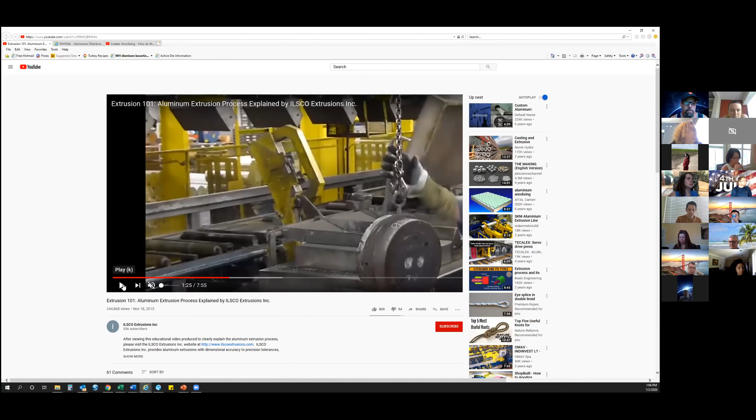This is a die. And where he just pulled it from was what they call a hot box. Before the die can go to press, it needs to get loaded into the hot box and heated up to a specific temperature. That way the heated up billet can easily flow through the die.

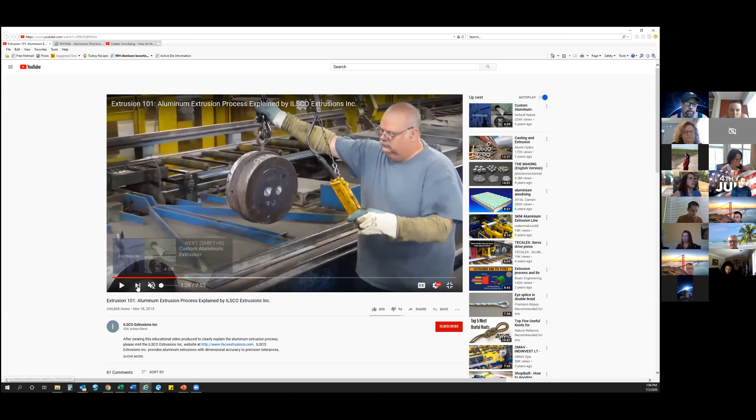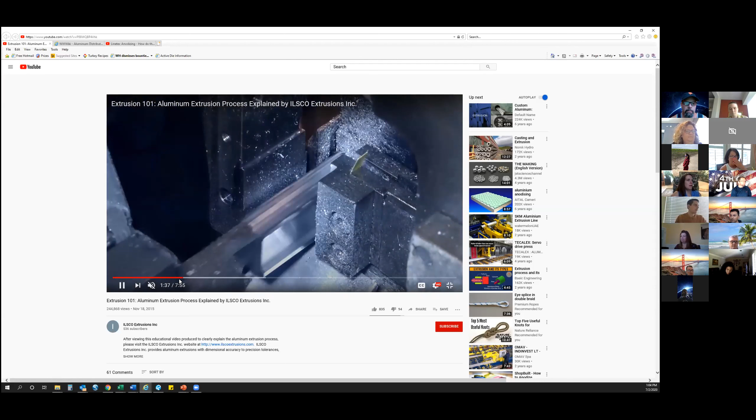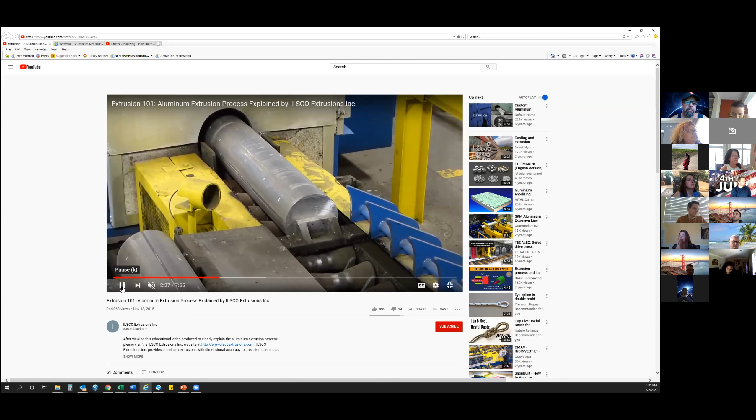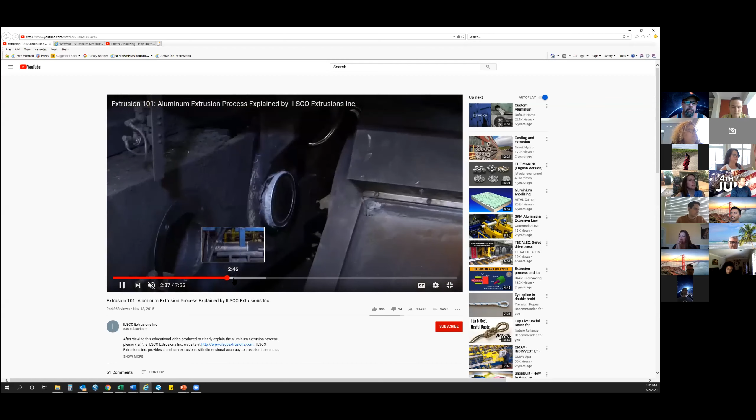These are billets, or you'll hear them called logs. That is what's getting fed into the press. The logs can be at different diameters depending upon the press size. And before the billet goes into the press, it does get heated up to a high temperature, and then will get pushed through the die.

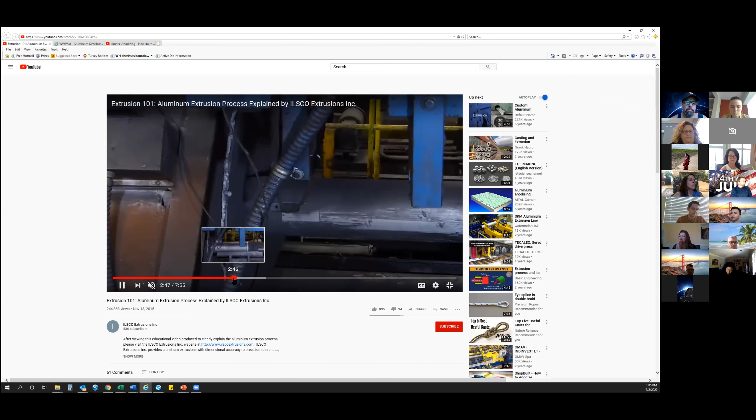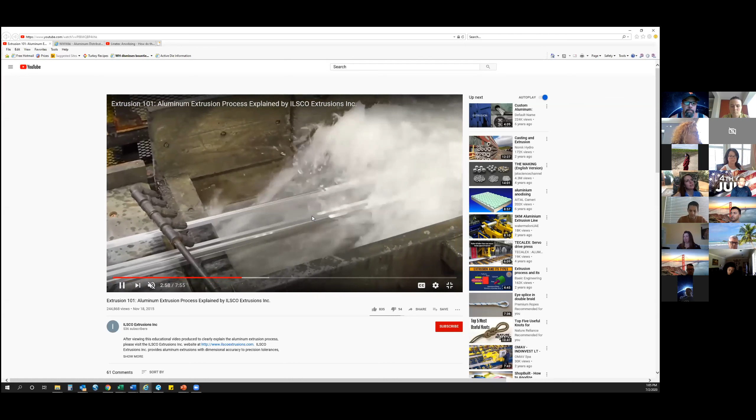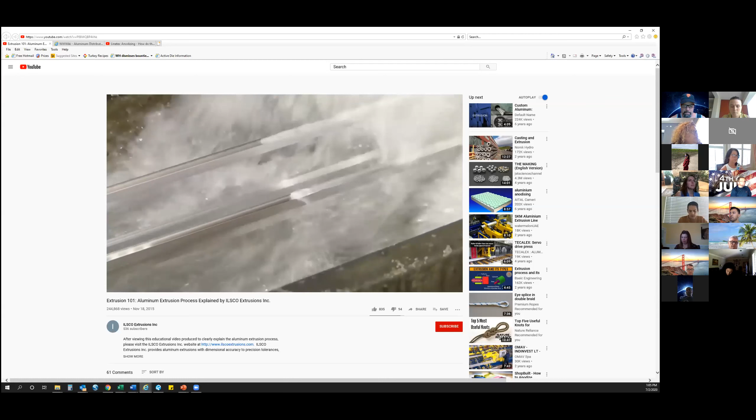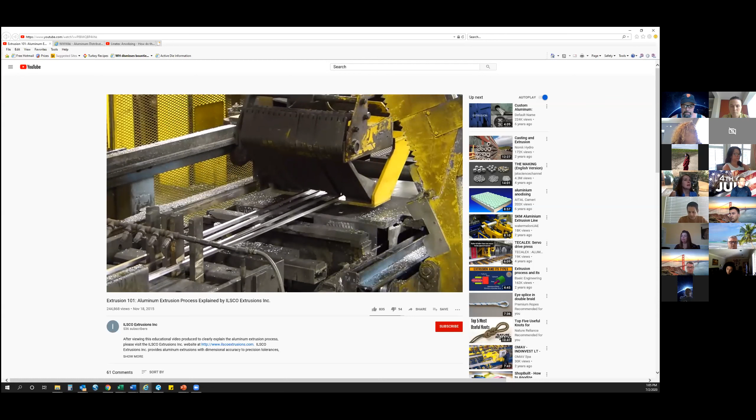As the material is getting pushed through the die, it's coming out into a quench, which can either be water or air, forced air. Typically, you'll see a lot of presses have forced air because the water can be messy. This is critical because you want to cool down the extrusion rapidly so that the properties set to give it its strength. And this can be an issue, especially when you're talking about structural alloys. If it does not get cooled or quenched fast enough, it will not meet the properties.

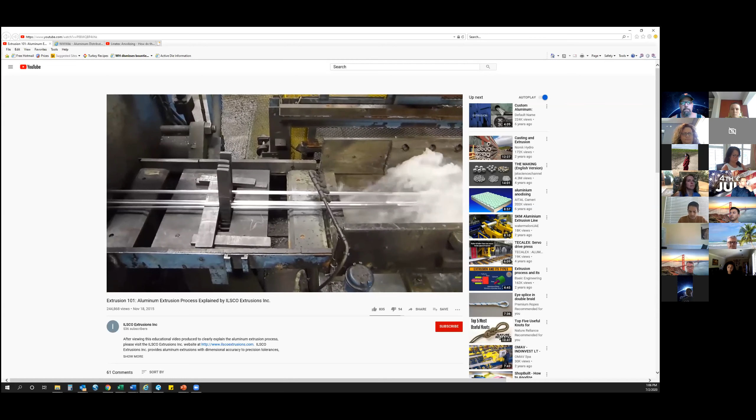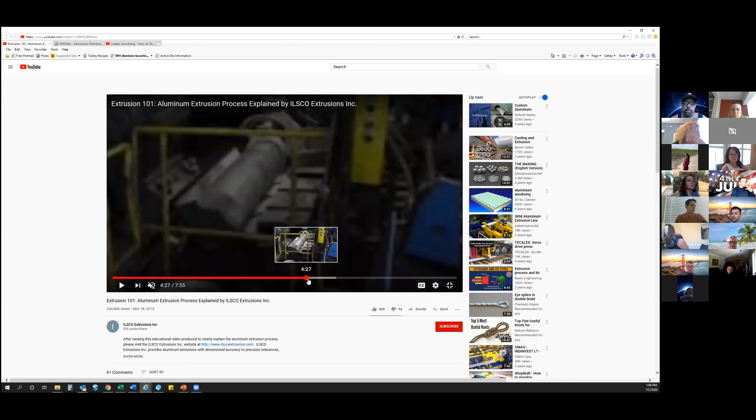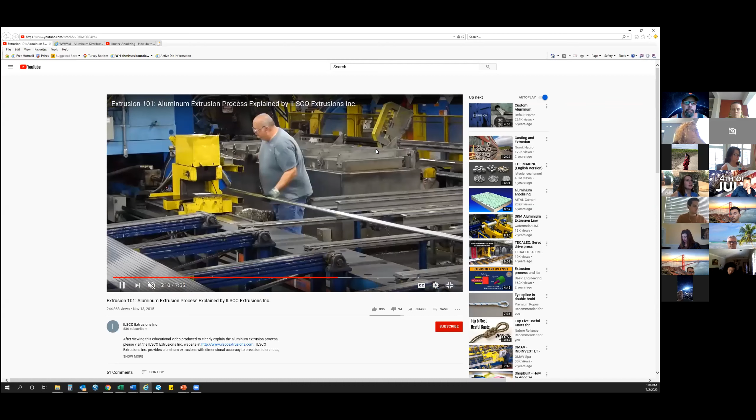After it goes through the quench process, an arm comes and grabs the material and it pulls it down the table, just helping facilitate it. Then it'll go into a set of stretchers, which basically straightens the extrusion and sets the properties. And that's what gives it its final shape.

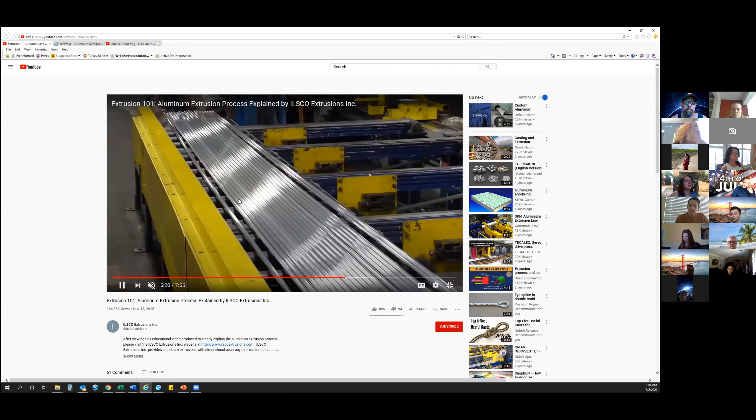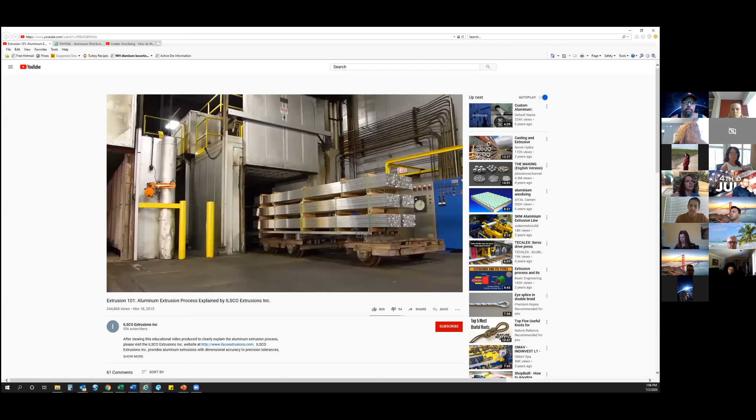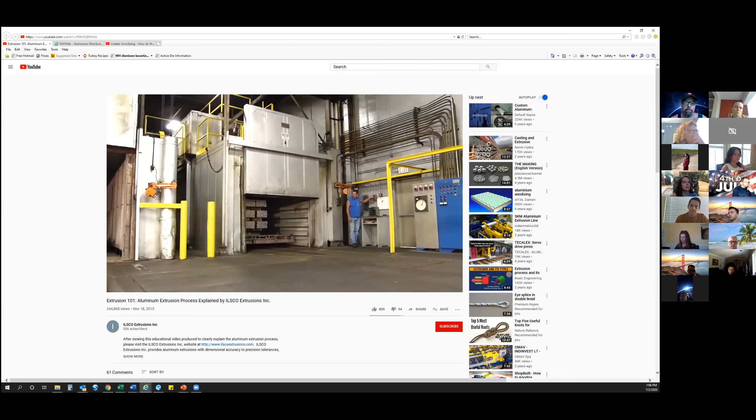Then they will typically give it a rough cut to length. There is a slight variance in that tolerance. And then it'll go into an aging oven where it is artificially aged, and that's what brings it up to the temper. Typically we have T5 or T6 with our architectural shapes.

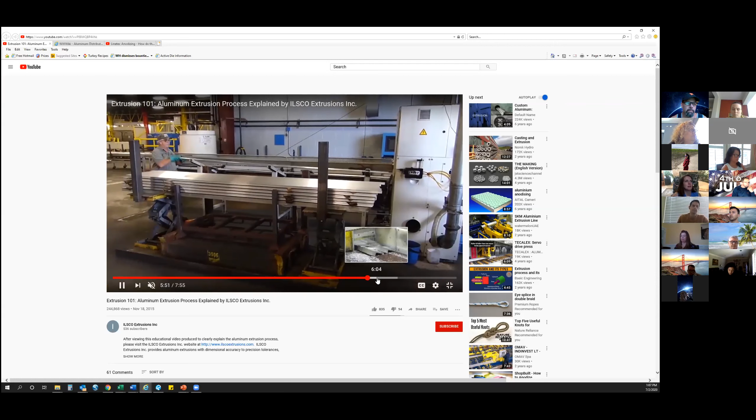And then from the aging oven, it'll either go to fabrication or it'll go to the paint line. And then it'll get packed to come to us.

So basically in this presentation, it's focused on the process starting with the die package and ending with QC out in the shop. This presentation is kind of lengthy, so at the end of each section, I will see if anybody...

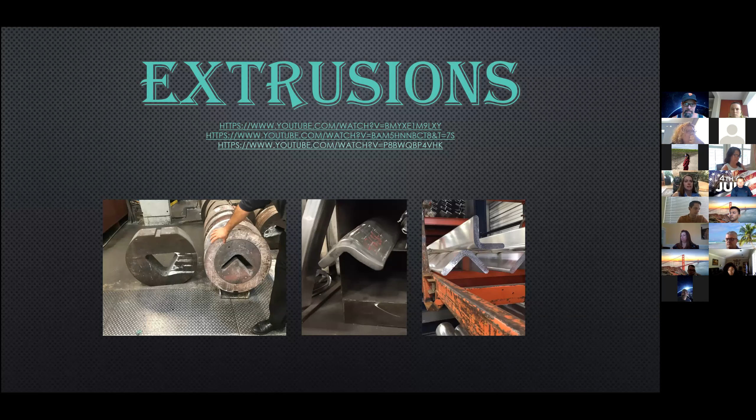So since we're a custom design glazing company, most of our projects require new profiles for extrusions. The first step in the process is the die package and the die drawing process.

Jumpstart provides a set of profile drawings that contain all of the new and existing parts to be sent to the customer for approval. When this is happening, a preliminary set of die drawings is being sent to the extruder to review and comment.

Any extruder requested changes will be incorporated once the approved profile drawings are received back from the customer. Jumpstart will then update and send a new die package to the PM and purchasing.

And while the drawing process is going on, we're keeping track of when the die package was sent to the extruder and when it gets returned, when the die drawings get returned, when they get approved. If there is a revision, we track when it goes back to the extruder for revision and when it gets returned back to us.

And then once the die drawing process is complete, a final die print is sent, and that's what gets processed and posted on the portal, and part drawings get generated for the drafting and takeoff teams.

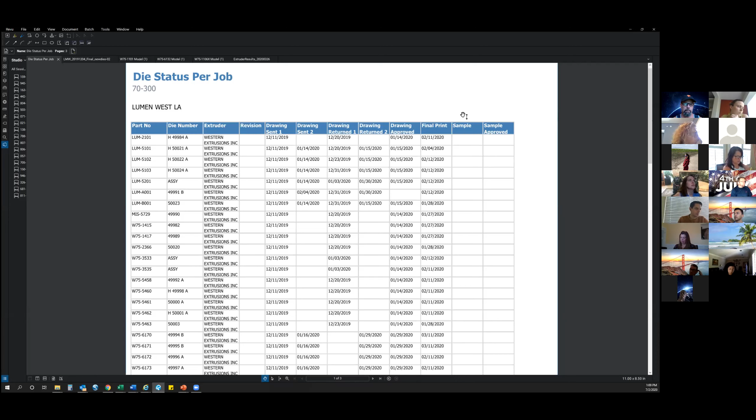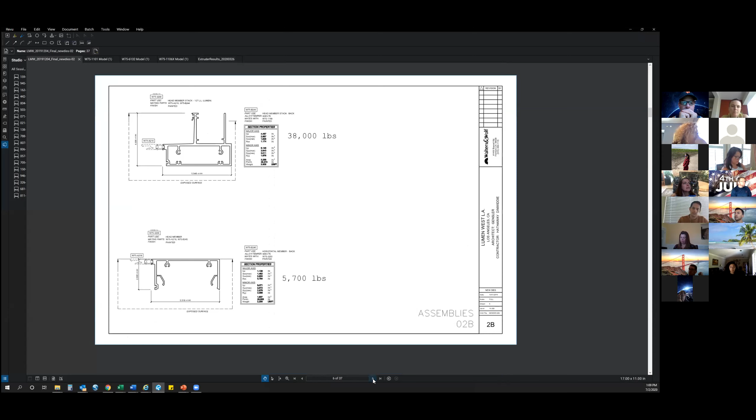Here's an example of a die package. A die package, like I said, contains all of the new shapes and details for the project.

Purchasing will release the new die package to the selected extruder once all the project information and warranty forms are filled out by the PM, and we'll go through that a little bit later. And a die quote will also be requested at that time.

Once all the die drawings are approved, purchasing will release a purchase order to the extruder.

We'll also request first article samples. Standard first article samples are 3 each, 4 feet long, in mill finish. If there are new assemblies, which are 2 separate individual dies assembled together using a thermal break, those will be ordered in 12-foot lengths. The cost for samples and assemblies varies by extruder.

If any of the new dies are going to be used on a visual or performance mock-up, we will not request the standard first article samples. We'll extrude the material required for the mock-ups and check our samples from that. It helps save some time and money in the process.

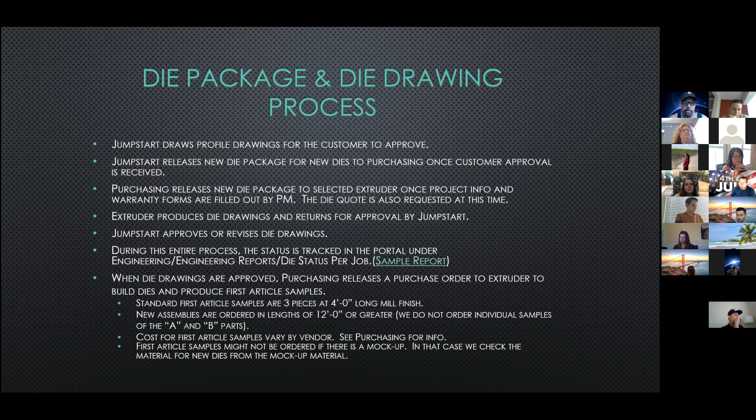Once the first article samples are received, smaller pieces are cut for Jumpstart to approve from. They're typically 6 inches long. The samples are checked for fit with the mating parts and critical tolerances.

Once all of the new dies for a project are checked, Jumpstart provides purchasing with the approval information, and purchasing releases the sample approvals to the vendor. That way, when the vendor has the sample approvals, they're able to release the production order for processing.

It's important to know that once the dies are built, any changes to the profile will result in a revision to the existing die or may require a new die, and there is a cost associated with those changes.

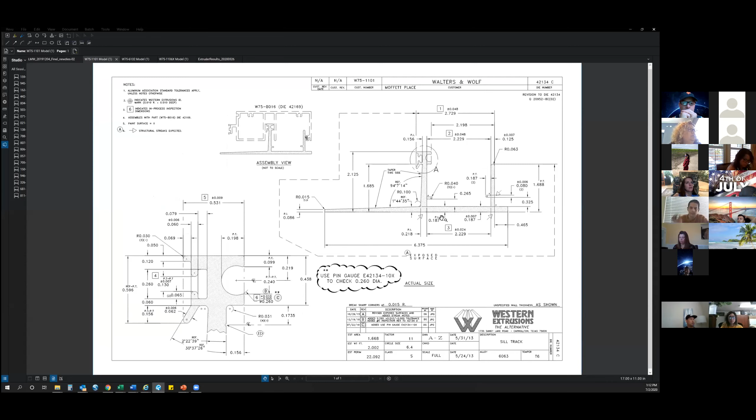I already showed you an example of a die package, but to go into a little more detail, sometimes you'll hear dies called out as being solid - this is a solid profile. You may also hear the word hollow. Hollow dies are a little more complicated and more expensive. Any part of the die that forms a tube is considered a hollow.

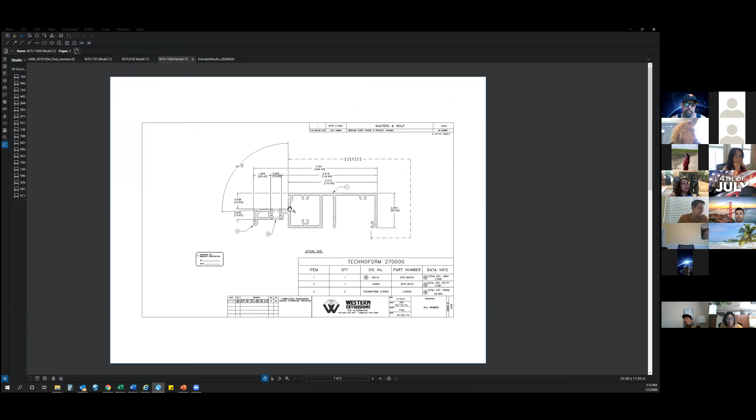Next we have assemblies. Assemblies consist of 2 individual dies, as you'll see here, joined together by what we call a strut or a thermal improvement. Initially this assembly is 2 individual dies. We call the front part, or the exterior part, of the assembly the A part, and the interior portion the B part. So there are really 2 individual dies that make up that one assembly.

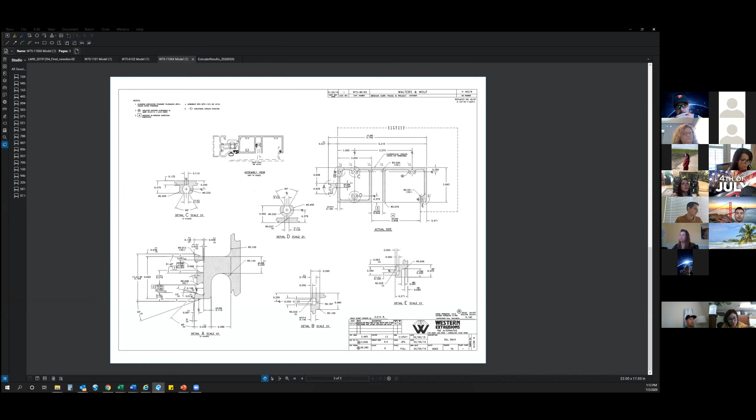When the die package gets released to the PM, purchasing will send over a project scope sheet and warranty forms to be filled out. This information is required before the die package will get released to the extruder.

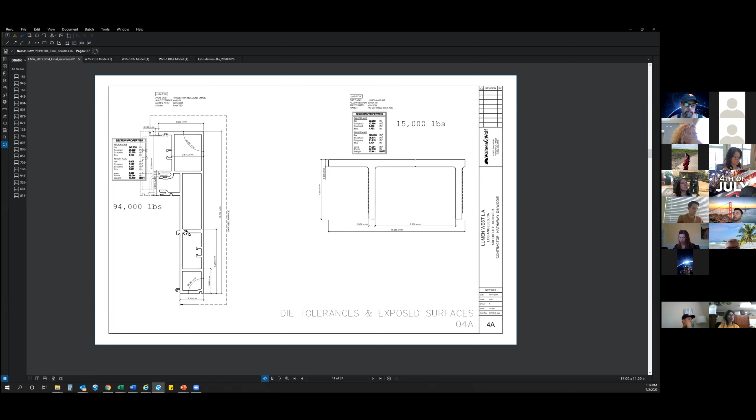On the scope sheet, we're looking for the quantity of new dies and the approximate pounds per new die. Going back to the die package, on this project here, the PM wrote down the approximate pounds required per die - it's not the lineal footage. If all you have is lineal footage, we can use that, but we'd like to have it in pounds.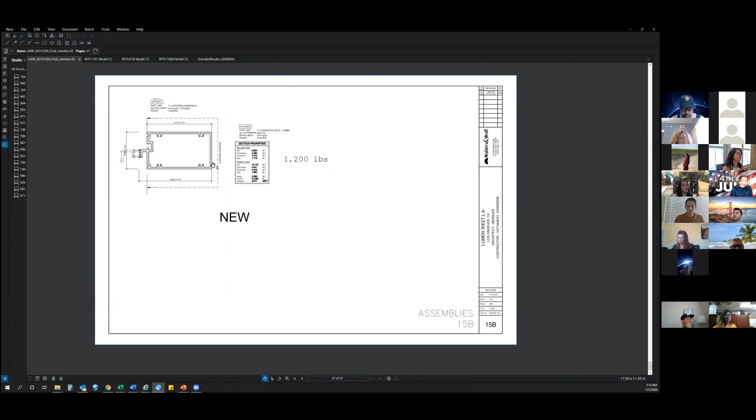And if you have an assembly, we require either the total lineal footage of the assembled part or just what the pounds are for each of the new profiles.

We also require the extruder results report. The extruder results report is a list of dies, or parts, that are going to be used on the project. This is an example of the extruder results. If the part numbers are in red, that means the dies are new to the project, or that they at one point were existing but are no longer active at the extruder. That means we would have to rebuild that die, and there could be a cost associated with that.

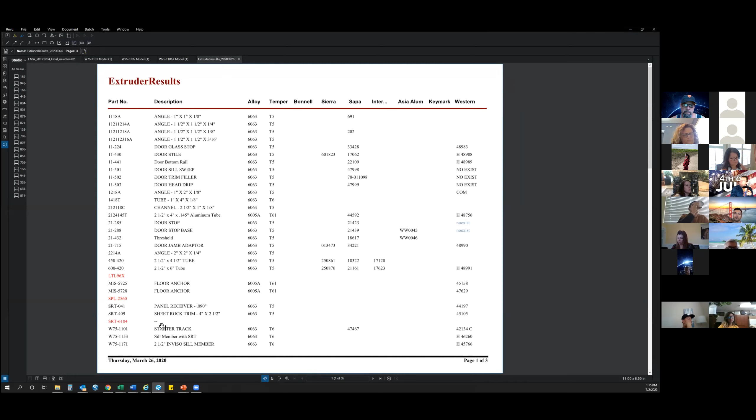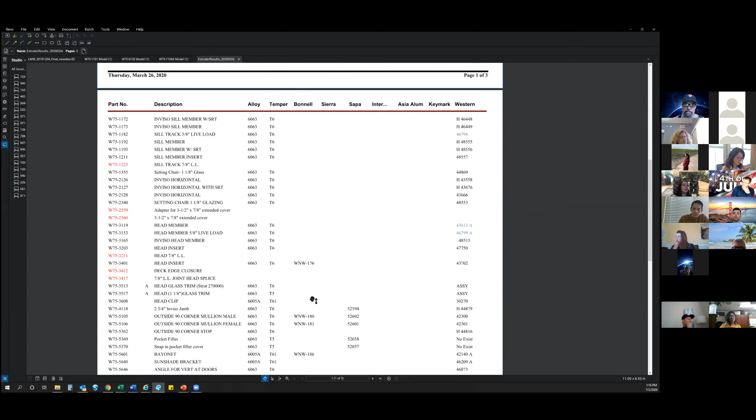Getting this extruder results also lets us know if any of the dies need revision. If the die number for a vendor is in blue, that means there's a note associated with that profile, and I need to go in and see what that note is for - if that die requires a revision or if there's something else that needs to be identified on that part. So it's important to get this list, so we can send it to the vendor and make sure all dies are active.

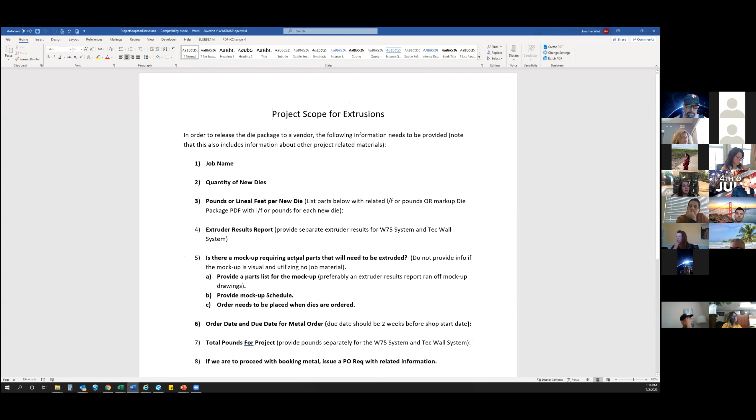We also need to know if there's going to be a mock-up on the project, so we're not ordering first article samples as previously mentioned. Also, what the project schedule is - the order date and due date for the metal order - so the vendor can block out time in their production schedule for our order. Total pounds for the project gives the information needed to book metal.

Also, the finished warranty form is provided so we can get warranty pre-approval for the finish on the project. You fill out the project name, address, what types of components are being painted, what the end use is, the paint code, and the number of years required. Or if it's an anodized project, you'll fill out what type of anodized finish is required.

A few additional things to know about extrusions. The thermal strut, as mentioned before, involves two separate extrusions and joins them through the use of an engineered structural polyamide plastic. Each extrusion will have features to receive the strut material, and as you can see on this profile on the right, there are little details in each extrusion that allow that strut to be inserted and then crimped into place.

I did want to touch on some of the terminology. Sometimes you'll hear that a double dog bone is being used, that's when there are two struts holding the profile together. A hollow profile is this middle picture that forms a tube, and then this would be a single dog bone strut.

Alloys that we use are 6063, 6061, and 6005A. 6063 is typically used for cosmetic architectural applications, which is a majority of our extrusions. 6061 is used for structural applications, such as our hook lugs, mat clips, shear block clips. And 6005A is also used for structural applications. It has equivalent properties to 6061, but the makeup of it is a little bit easier for the extruders to push through their dies, it's not as rough on the dies as the 6061.

We touched on tempers earlier. Typically the extrusions are T5 or T6, and the temper represents the hardness of the metal in direct correlation to its strength. One thing I did not put on the slide is if you require your material to be stretch formed or bent, the alloy that needs to be provided to the stretch former will be a lower temper, that way it's more ductile for the stretcher to form the material.

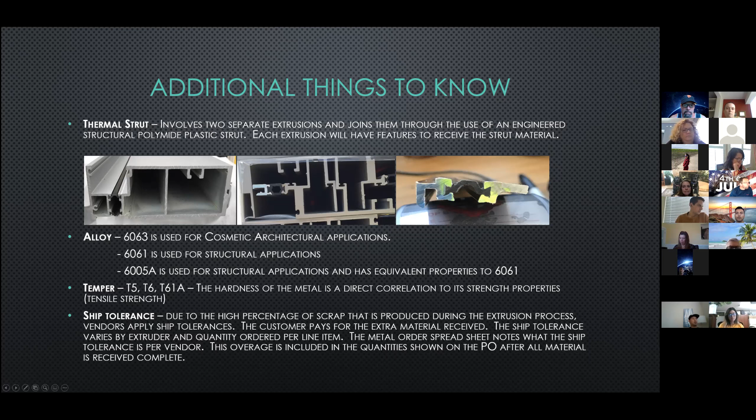The next step to take place in the schedule for metal is typically the metal booking. The term metal booking, or locking in metal, means to secure a committed price via contract with the vendor. When the metal booking form complete to purchasing line is complete, or if it occurs in your schedule, review it with purchasing on the next steps. The reason to review this is sometimes the step has already been addressed during the die drawing process and with the project scope form being filled out.

But it's always good to follow up again when it shows up in your schedule. Metal is typically not booked until we have received a contract for the project. If we want to lock in metal prior to a contract being received, there is a letter that the customer needs to sign acknowledging what the risks are for us to proceed with booking metal.

Metal also might not be locked in due to what the market is doing. If the metal market is low and there's not a lot of variation, I may hold off on locking in a price just because there's an opportunity for the metal price to drop, and we want to take advantage of the best pricing we can get. I review on a job-by-job basis whether we should lock in the metal or not.

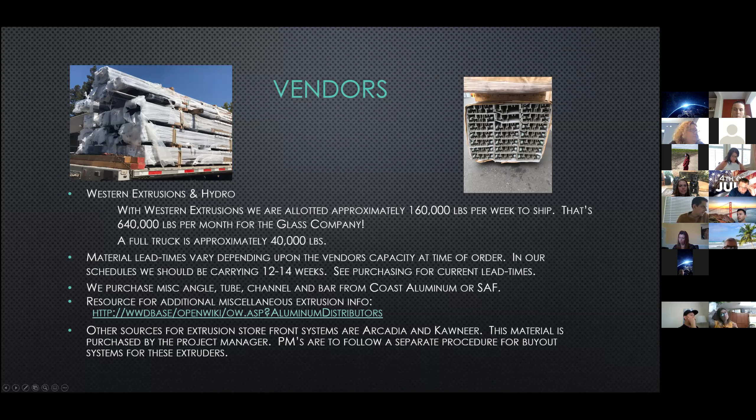So does anybody have any questions so far, before I dive into the metal orders?

When you say onesie-twosie, do you mean like items that we had to reorder or just were missing or whatever, or do you mean like a small job?

No, I'm talking about things that got missed, or replaced, or we misfabricated some material in our shop. Or let's say the customer hadn't decided yet at time of order what the SRT is, those types of orders. So I'm talking about typically somewhere under 5,000 to 10,000 pounds of material.

Okay, typically on the smaller side. A lot of it depends upon the vendor's capacity at the paint line, especially if it's painted. That usually drives what the lead time is.

Or even if you have to get a part, if you have an assembly which requires the thermal break, that adds an additional week onto it. So there's a lot of variables for lead times at the vendors. On the smaller line item orders, those are the ones that can typically get pushed through faster. Got it, thank you.

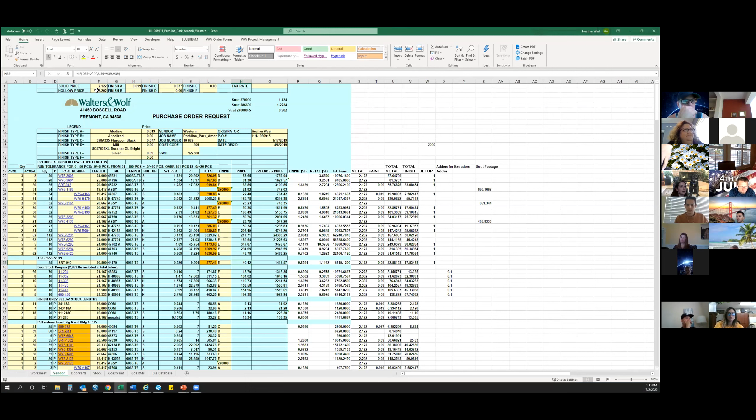Make sure you fill out the metal price. At this point, with you guys filling it out, it's not so much for me as it is for you to make sure your metal order is going to be within your budget. If we did not book metal on your job, I would just default to the price that sales carried, or you can check with purchasing to see what the current price is, but it will not be finalized until we actually get ready to release the order, then lock in a price with the vendor. So make sure you fill in the price.

Finishes: the first 4 finishes on here are default finishes - the Alodine, Anodize, black, and mill. The section you guys need to fill out is your main paint color. Be sure to include the UC code and then the color name. And typically the F finish type is reserved for anything that's fabricated and post-painted.

You'll want to confirm the total pounds you're ordering and make sure it's equal to or less than what sales carried. If you have a big gap between sales and your actual metal order, you may want to do a little more research into it, especially if the pounds ordered is over the estimated pounds.

I wanted to point out that the quantity in the over column is a pre-calculated number, so don't go adjusting that. Talk to purchasing first before you adjust those numbers. The stock lengths shown are determined by takeoff and the optimization requirements, so you should not have to change any of the lengths.

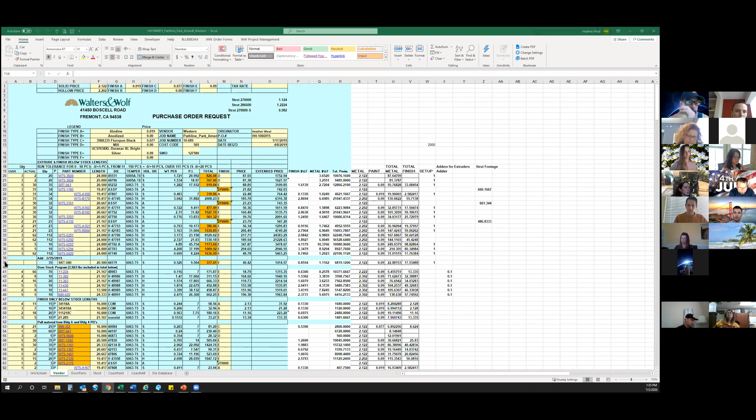One thing that typically gets everybody is if you need to add a part because it was not included at takeoff - something you discovered after takeoff did their process - you can't just go and insert a line. Each of these lines contains a lot of formulas, so the best thing to do is go to the bottom of the spreadsheet, copy that blank line, and then go insert it somewhere on your form, and start filling it out.

You'll want to make sure you fill out the quantity required. Like I said, if you put the quantity in the actual column, it will factor in the overage you need. Make sure you type out the part number correctly - it needs to have a dash in it. If you do not have a dash, if you do W755369 without a dash, it will not pull up the information regarding that profile. So you need to make sure you include a dash in your number. Make sure you put in the length.

And if for some reason you see information that comes over as no exist or NA, talk to purchasing and we can figure out what's going on with that profile. Okay.

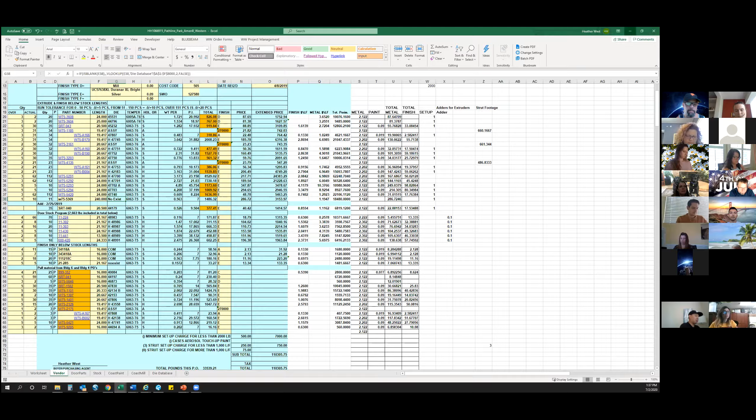All right, next we'll go over what purchasing does once we receive the order from the project manager. When purchasing receives the metal order from the PM, there are additional steps that need to be taken before it can actually be released to the vendor.

We confirm the metal price. If metal was not booked, purchasing will secure a metal contract with the extruder based upon the ordered pounds and the delivery date. We'll confirm the pricing for all finishes and struts, and confirm that all setup charges for each extrusion and assembly have been accounted for.

We then run a program on the Excel file that inserts the sub-assemblies, or the A and B parts, for each assembly. We review all the profiles and adjust the finishes if applicable.

Sometimes on the assemblies, initially that part is being called out as being painted, but once we insert the subassemblies, the A part may not be exposed. It may be covered literally by a cover. So in that case, we'll change the A part to an Alodine finish, and then we'll have the B part be the painted part.

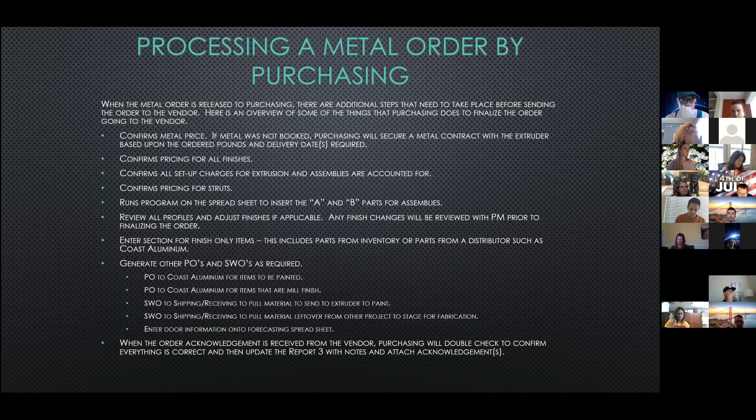So I wanted to give you a little idea of what happens at the extruder once we release the order. The dies are scheduled at the press approximately 5 to 6 weeks prior to the order due date. Dies are then released to the press approximately 3 to 4 weeks prior to the due date. And whenever we tell you that the die is at press, that means it's been sent out and put in that hot box, staged to be extruded probably within the next 24 to 48 hours.

Once the material is extruded, it is either sent to fabrication if needed or staged at the paint line. After paint, the material is either moved to the isobar or strut line if the parts are in assembly, or it goes to packing. Once all of the components for the assemblies are at the isobar line, the related parts are assembled together and then moved to packing. And then once packed complete, the bundles are staged for shipping.

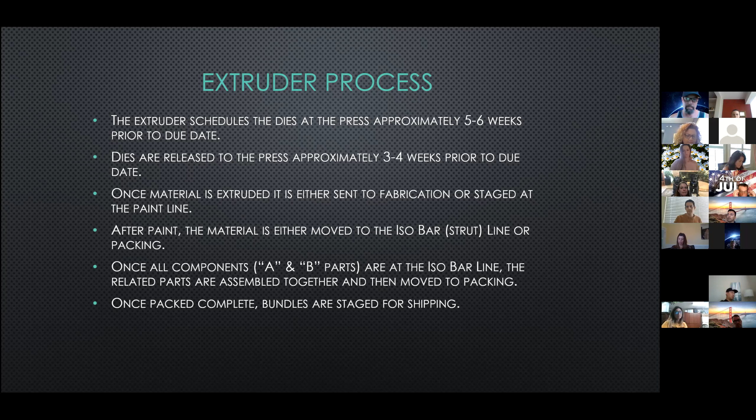When the material is ready to ship from the extruder, it notifies purchasing to schedule the delivery with the shop. After the truck is loaded at the vendor and unloaded at the shop, a packing slip is emailed to purchasing. When the material is received, shipping and receiving confirms that all the bundles per the packing slip are accounted for, and they note on the packing slip if there's any damage, bundles missing, or an extra bundle received. Then they scan the packing slip so it gets emailed to the project manager and purchasing, and links to the PO in the portal.

Purchasing tracks the material received on a printed copy of the metal order form. When the material for a line item is received complete, the PO in the system is updated with the actual quantities received. So if you ordered 50 pieces and the ship tolerance is 5 pieces, if we receive those full 5 pieces, your PO will show 55 pieces as received. When the order is received complete, the PO is finalized and sent to the PM, notifying them that the order is received complete, and that PO has the most accurate information on what was received.

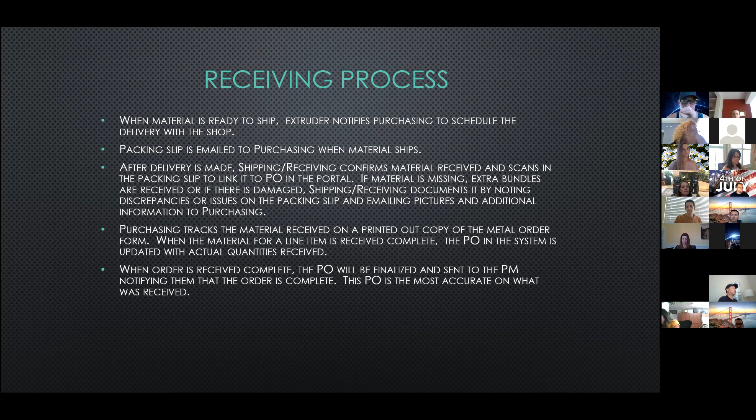I know we have some questions. Could somebody let me know what those are? I will let you know. Thank you, Jerry.

When purchasing splits up deliveries on larger projects, so we get the first 5 weeks worth of metal before we start, and then the balance during week 3 of fabrication, does the vendor extrude all the metal at once or hold it? Or do they extrude twice? If they extrude twice, we get dinged for double extrusion tolerances.

When we split it up, we take a look at that because we don't want to pay any additional setup charges. That's why any small run items, which are 4,000 pounds or less, would be received in the first delivery. The reason for the 4,000 pounds is if you have 3,600 pounds, their minimum run requirement to avoid a setup charge is 2,000 pounds, so there would be another 1,600 pounds, and that's not enough to avoid a setup charge. So we run anything under 4,000 pounds together and deliver it in that first delivery.

The only time we will get dinged a second time is on assembly parts. If we have a job with a horizontal, say 25,000 pounds of that horizontal, we only need probably half of that for the first 5 weeks of fabrication. So we will have 2 separate delivery time frames and get charged a setup charge for the assemblies, but that's more effective than having the shop sort through bundles and bundles of material. That's why we're splitting it up, so the shop isn't completely overwhelmed having to move around material that's not needed.

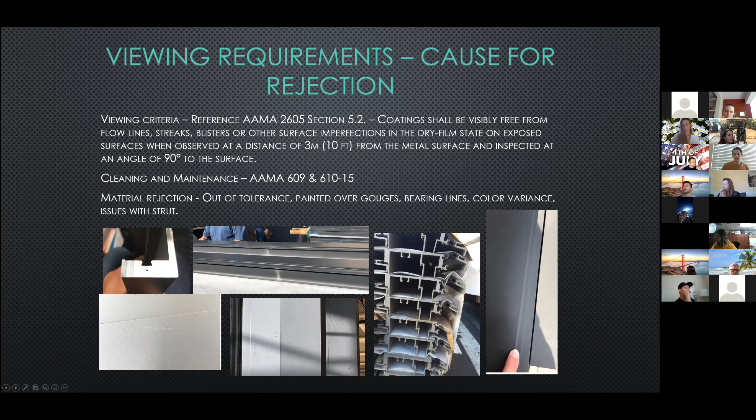This first one here to the left, the gasket raceway in the die was not properly extruded. The die clogged, so we would reject that material and ask for replacements.

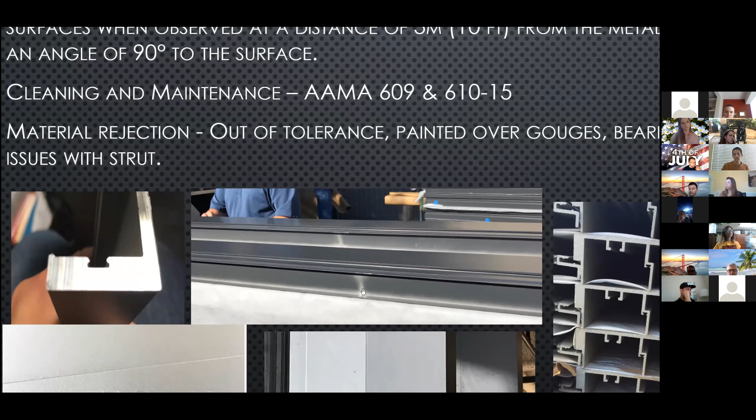In this middle picture here, there were rack marks on the exposed surface, so we would reject that.

Down here at the bottom, there's what they call die drag, where a chip got stuck in the extrusion and created a gouge in the metal.

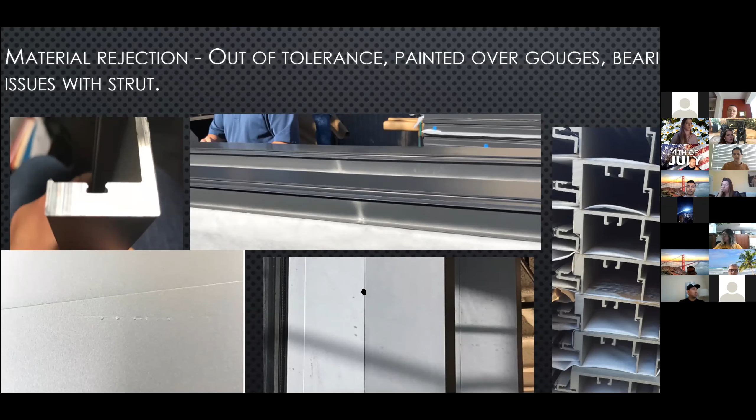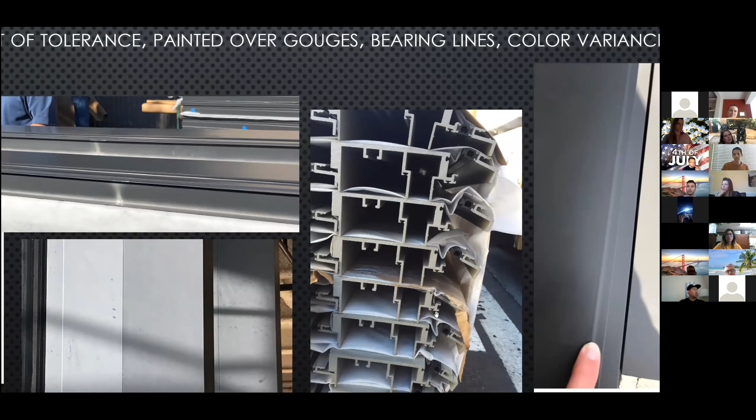Over here we have a variance in the paint colors between two parts, and the one is out of tolerance. And then on this one over here, the strut did not stay crimped and it fell off, so obviously we'd reject that material.

And here's just a couple other pictures of some die drag or gouges in the painted product.

Typically when there is rejection in the shop, we will notify the PM and purchasing, and we will go out and document what the damage is. Once we have a final piece count, we will request replacement material. When we do request replacement material, we are credited back the material less the scrap value. So we are getting a full credit, but we're not seeing it fully credited against the PO because of the scrap.

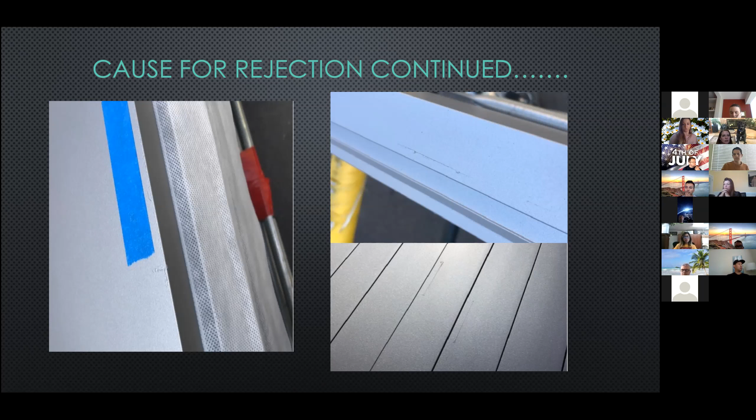And this ends my presentation. I know there are some other questions, Jerry. Jerry's gone. Oh, she had to...

Lisa asked: I just wanted to know when you get the scrap value, where does that credit go back? Does it go back to the job? No, it doesn't go back to the job. I don't know what they do with the check for the scrap when we scrap material.

Okay, probably just Walter's bottom line kind of thing. Yeah, and they use whatever our scrap rate is. Each extruder has their own scrap rate, but since we're scrapping it, they use what our local rate is, which I think currently is around 40 to 45 cents a pound.

Were there any other questions? I had one, Heather, on strut assembled parts. On a horizontal, I feel like I've heard sometimes the front part might slide a little bit in the shop. Is that a possibility, or do you not think it's supposed to happen?

Yeah, no, if the parts are moving, that should not happen. There's a problem there, and I should be getting notified about that for replacements. That should never happen. I know it has happened a couple times, but it was caught and we replaced the material right away. So that should not happen. If that's happening, they need to notify us.